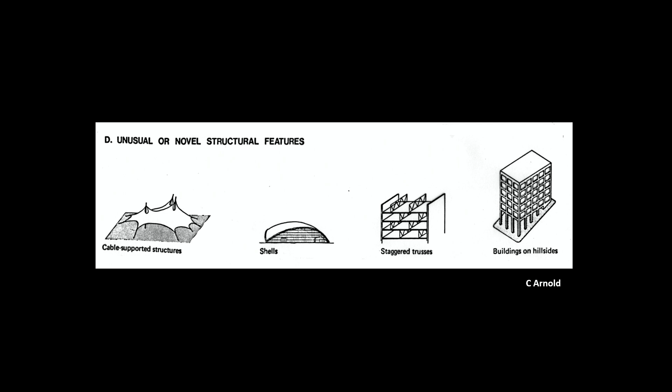In the words of Geoffrey Wood, one of the 5 founding partners of Ove Arup and Partners, earthquake-resistant design is really a problem for architects. So several years ago, the Institution of Structural Engineers Caribbean Regional Group, with support from the Pan American Health Organization, Dr. Van Alphen, hired Luigi Desano to deliver a series of 3 lecture series. There were 3-day courses held in Jamaica, Barbados, and Trinidad.

The courses were in base isolation. The first day of those courses was devoted to architecture. So we invited the Barbados Institute of Architects, the Trinidad and Tobago Institute of Architects, and the equivalent body in Jamaica to attend those courses. Not one single architect attended any of the courses in Jamaica, Barbados, or Trinidad. But Geoffrey Wood said, earthquake-resistant design is really a problem for architects.

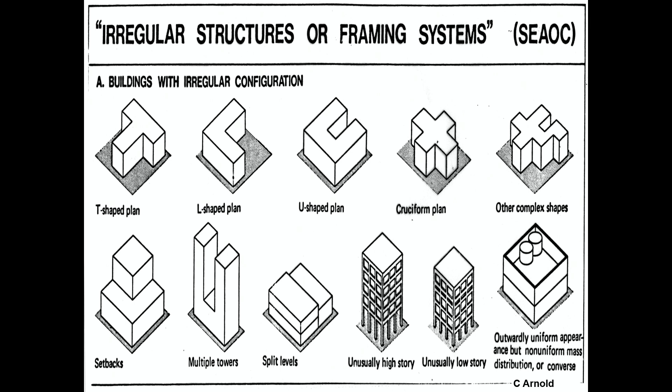So either the architect has a better than usual knowledge of the basic principles of the conceptual design of earthquake-resistant systems, or the architect should involve the structural engineer in the initial discussions and development of the building concept.

That's the central bank in Barbados. It's not a correct representation because our Prime Minister, Tom Adams, at the time, thought the building was too short. So after the model was built, he told the architect, add 2 floors. So the actual building is 2 floors taller than that. But before Mervyn Awan, the architect, drew a line, Mervyn and I spoke about the building for 2 weeks. And in those 2 weeks, Mervyn conceptualized the building in such a way that it made my life a lot easier designing the structure. And the extra cost of earthquake-resistant design of the structure, over simple gravity loads, was $0.

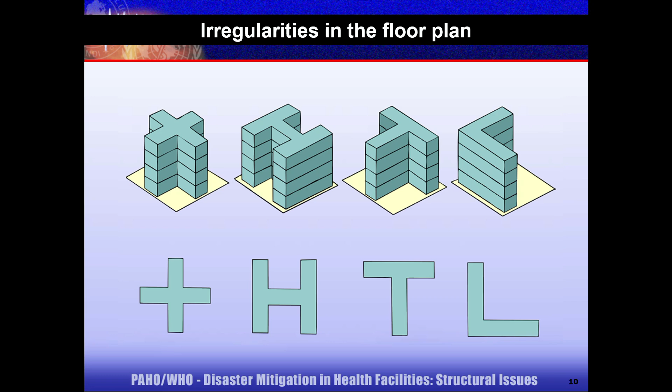Another famous engineer, Henry Degenkolb, who lectured in Trinidad in 1978, he was here for a major conference at the Hilton. Degenkolb is emphatic in stressing the importance of configuration. He says, if we have a poor configuration to start with, all the engineer can do is to improve a basically poor solution as best he can. Conversely, if we start off with a good configuration and a reasonable framing scheme, even a poor engineer can't harm its ultimate performance too much. So if you have poor engineers, make sure you have a good configuration. And this last statement is only slightly exaggerated.

So, what I have said so far warrants discussion among the various disciplines involved in the design and building processes. A Nicaraguan architect called Terran recommends that buildings be simple, continuous, symmetrical, straightforward, and repetitive. And this advice is given not as an absolute, but as a qualitative factor that influences the reliability of the structure. Terran, the architect, asks for understanding and knowledge among the disciplines, not the imposition of mandatory constraints.

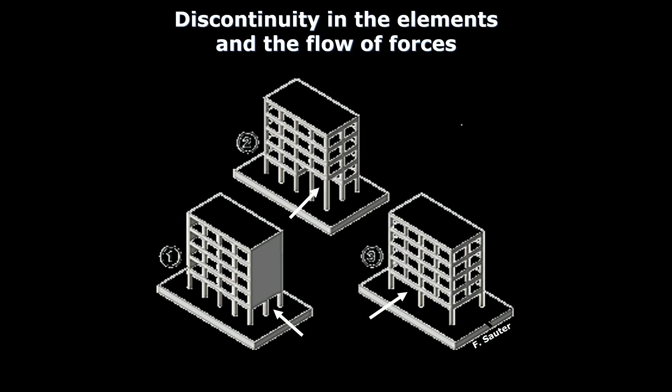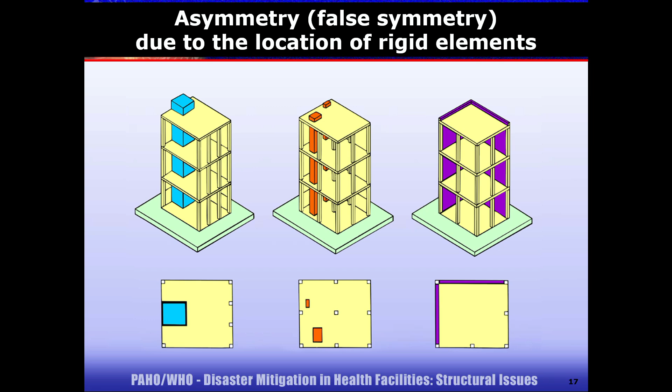Those 2 slides and several others come from a very good package of slides from the Pan American Health Organization. It's the health sector that's interested in safe buildings. Not the Ministry of Works, the Ministry of Health. Very interesting.

Now, that's a hotel at Heathrow Airport in London. That's a perfect shape for earthquakes. That hotel in the bottom is a circular hotel with shear walls around the perimeter, in a perfect location for resisting torsional forces. It's symmetrical. I don't think the engineer and the architect at Heathrow Airport were concerned about earthquakes, but accidentally they produced a perfect earthquake-resistant design for the hotel at Heathrow.

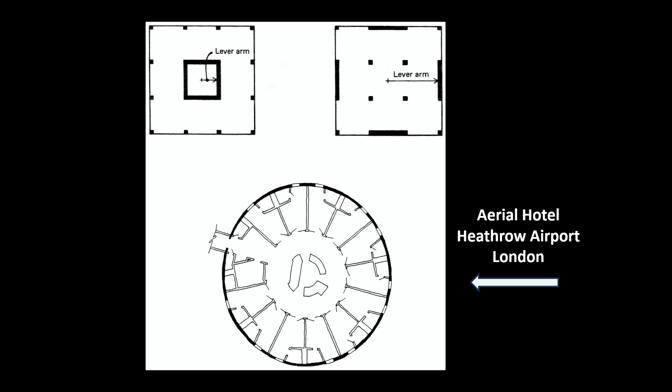I think Luigi spoke about soft stories at the Olive View Hospital. You know, that earthquake in 1971, the San Fernando earthquake, over 90% of the deaths occurred in hospitals. And that's interesting. And Olive View was rebuilt after that 1971 earthquake, to the best standards available in 1971. And in 1994, when the Northridge earthquake occurred, Olive View Hospital was closed for a month to patients. So even the best standards are insufficient if you don't have base isolation.

Because earthquake resistance depends on the failure of elements to absorb the energy. Yeah, soft stories kill people. Killed 18,000 people in the Izmit earthquake in Turkey in 1999. So what we need are weak beams for earthquake resistance. We need our beams to be weak so the columns don't fail. If you have strong columns and weak beams, you're in better shape than if you have strong beams and weak columns.

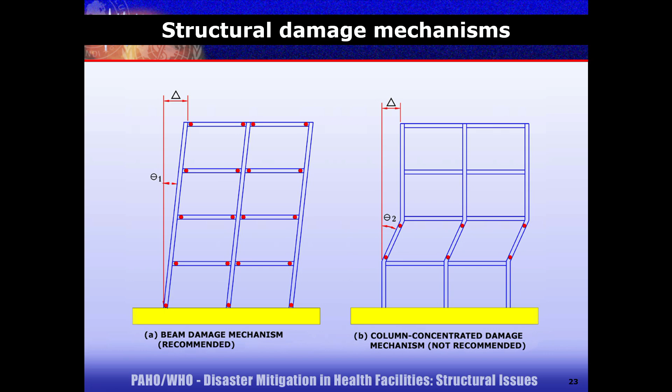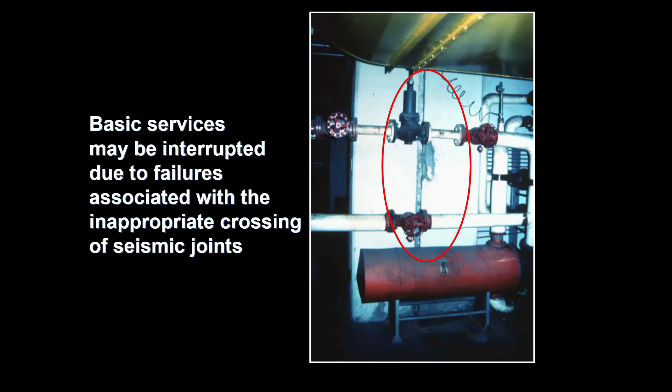Of course, most of a building is non-structural. Most of this building is non-structural. So we should really pay attention to the non-structural components as well. And that's outside of the realm of engineers. This particular building, let's go back. This particular building is interesting because it has a 200 millimeter separation joint from the top to the bottom of the 15-story building. That's for earthquakes, so that one side of the building does not clash against the other side during an earthquake.

But the corridor between the bedrooms on both sides of the building has a ceiling like this, which runs continuously across that joint. And there have been four earthquake events in the 50-year history of this building; it was opened in 1974. The first event, the ceilings broke, and at every one of the 10 bedroom floors you saw this gash in the corridor, which alarmed the management, and they called our office in Trinidad and said, come and see what's happening, the building is breaking in half. So we came, and our report explained that there's a big joint there, but the architect had put a continuous ceiling across it. So it's just a ceiling to be repaired.

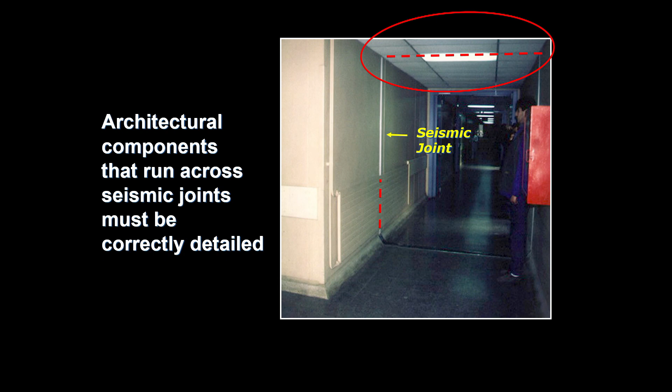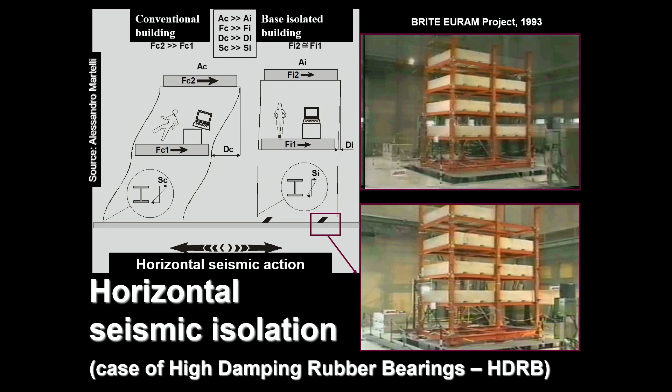And if you have an irregular building, then you go to Luigi and you get it base isolated. Or Shalini is doing that these days. So that's a solution for those who want irregular buildings. By having base isolation, you avoid the excitement of being in a non-base isolated building. So which one would you prefer to be in? You want the excitement, or you want to have a dull life? You see.

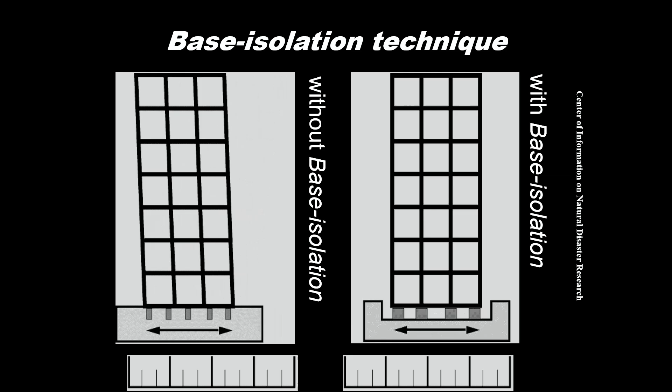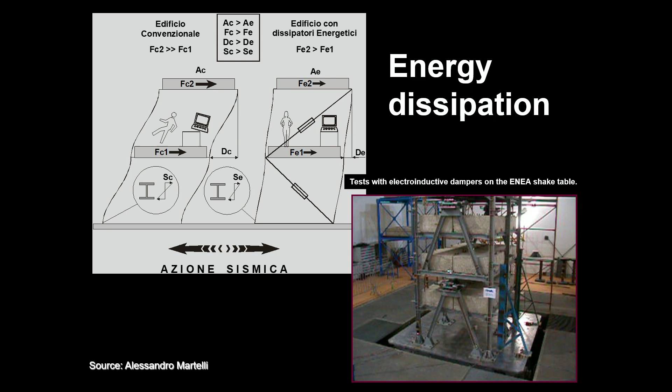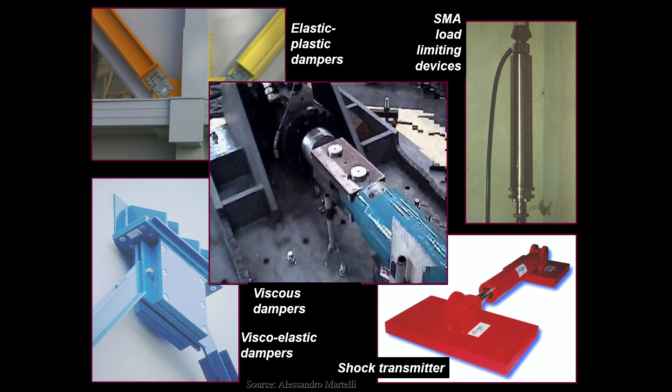So there are other ways of dealing with this. You could have energy dissipation with mechanical devices. I think I can show you some of those mechanical devices if I get this thing to work. The thing is to absorb the energy. After the Mexico City earthquake in 1985, the following year I went to Mexico City for a one-year commemorative conference. And in the Social Security building, I saw that yellow thing there. I can't see over there. There's a yellow device there, similar to what Luigi showed, to absorb the energy of the earthquake. That's a retrofit method.

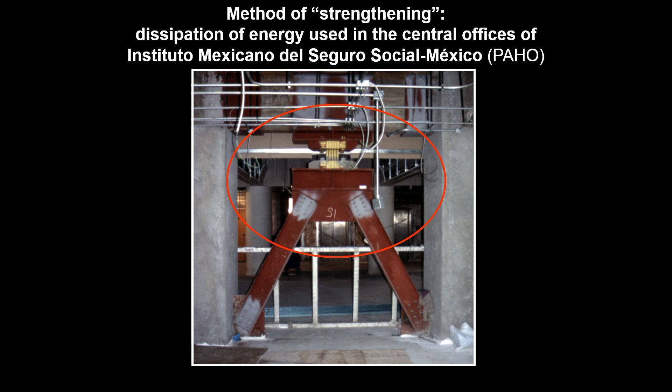Okay, that's really all I'm going to say, but my co-author will examine the problems for the architectural designer when confronted by earthquake hazard and some of the possible solutions. In the past 30 years, there's been inadequate attention to the earthquake hazard by the engineering community and almost none by the architectural profession. It is hoped that in the next 30 years, we will see all disciplines among design professionals paying much greater attention to earthquakes and much more collaborative design at the early stages of projects.